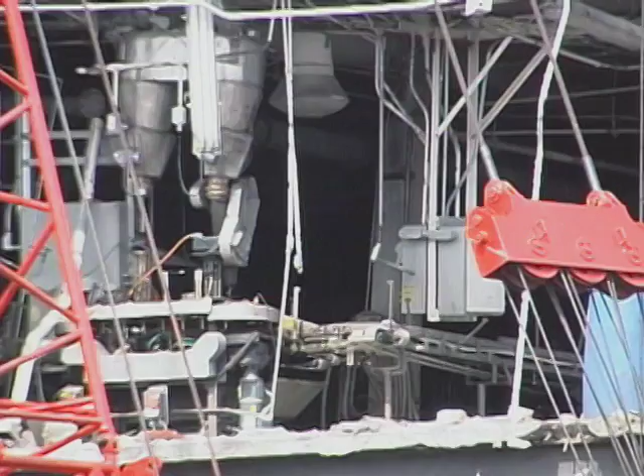Explosions raced through the buildings, fueled by accumulations of combustible sugar dust and sugar that had spilled from equipment. Thick concrete floors heaved up, and brick walls were blown into stairwells and work areas, blocking many exit routes. Fires spread rapidly.

8 workers died at the scene. 6 more died later at a regional burn center. Dozens of others were injured. The plant's massive sugar-packing buildings were a total loss.

The accident at Imperial Sugar was the deadliest industrial dust explosion in the United States in decades. It highlights the extremely serious nature of combustible dust hazards. There were significant accumulations of sugar dust and spilled granulated sugar on surfaces throughout this facility. Conditions were set for a catastrophic accident.

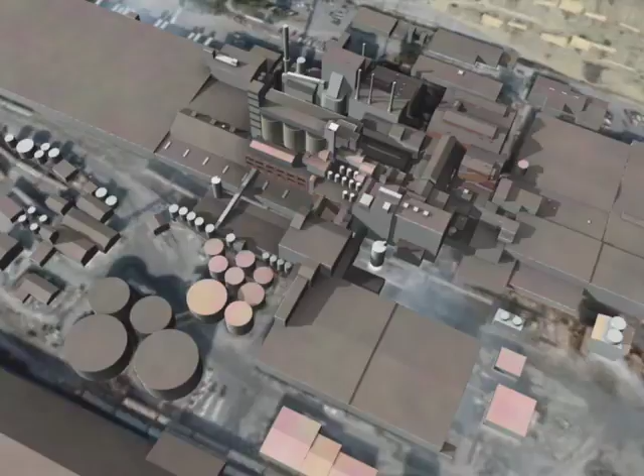Imperial Sugar's sprawling Port Wentworth complex began operations in 1917 and grew to become one of the largest sugar refining and packaging facilities in the U.S. Granulated sugar from the refinery was stored in three 100-foot-tall silos and then conveyed into packing buildings where it was packaged for distribution. Granulated sugar was also converted into specialty products, such as brown sugar and powdered sugar.

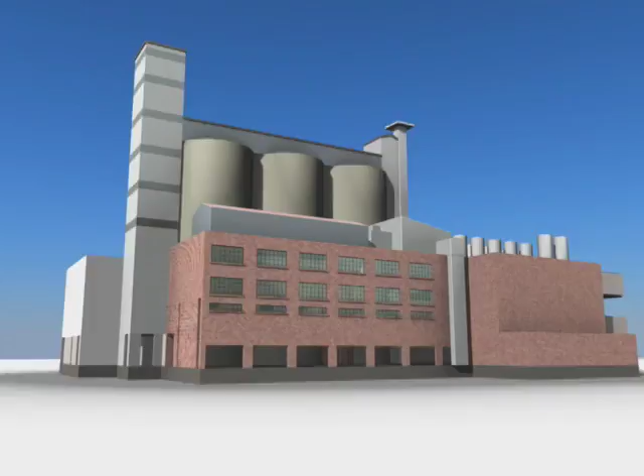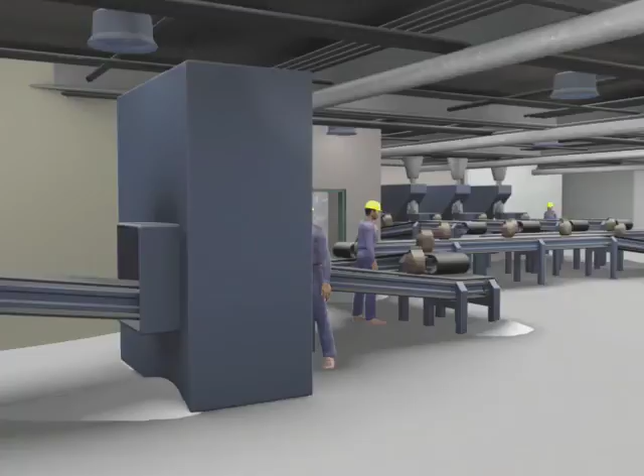Sugar was transported by a complex system of bucket elevators, screw conveyors, and conveyor belts. During this process, sugar spilled onto floors throughout the work area. In places, the spilled sugar was many inches deep.

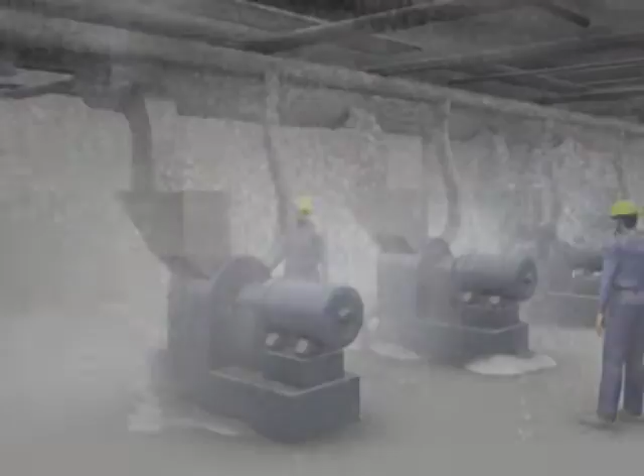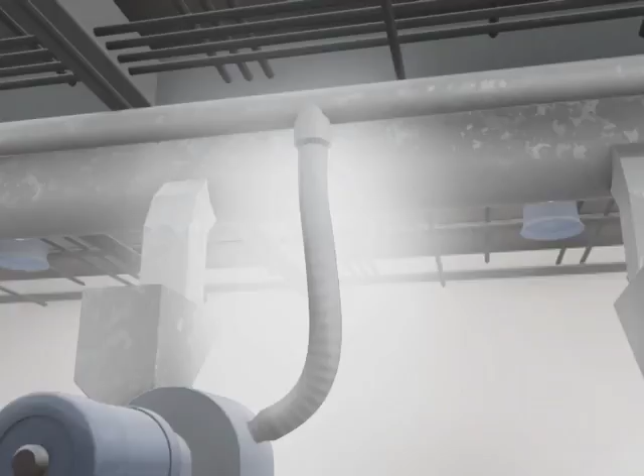This sugar also contained fine particles which became airborne. In addition, hammer mills were used to crush the granulated sugar into powdered sugar, creating even more dust. The machines were connected to a dust collection system, but it was undersized and in disrepair. And it was not connected to the bucket elevators and conveyors.

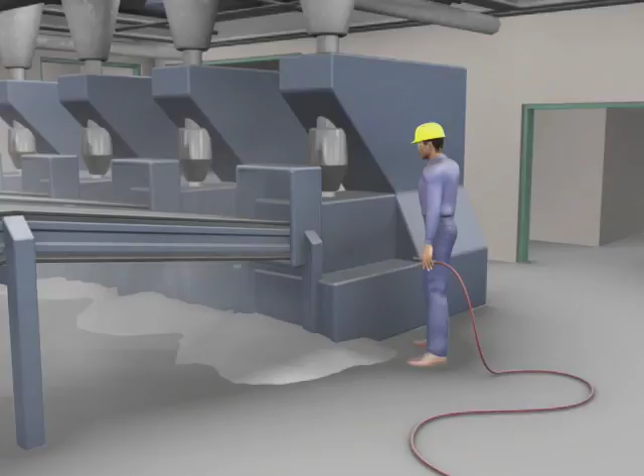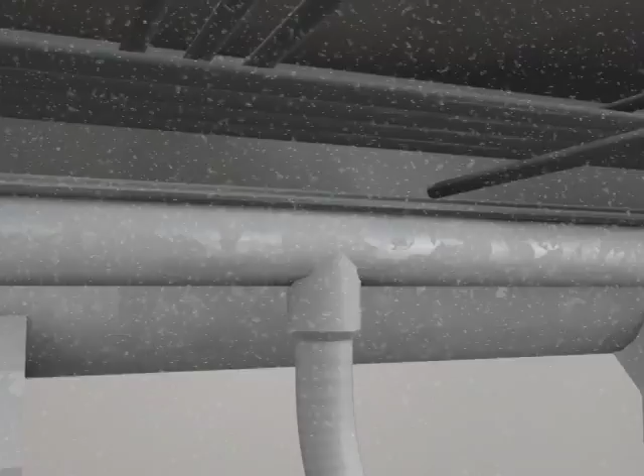Significant amounts of sugar dust escaped into the work areas. Workers routinely used compressed air to clean packaging machines, further dispersing sugar dust throughout the buildings. Over time, large amounts of dust accumulated on elevated, hard-to-clean surfaces, such as ducts, beams, and light fixtures. These surfaces were not cleaned often enough to always keep the dust below hazardous levels.

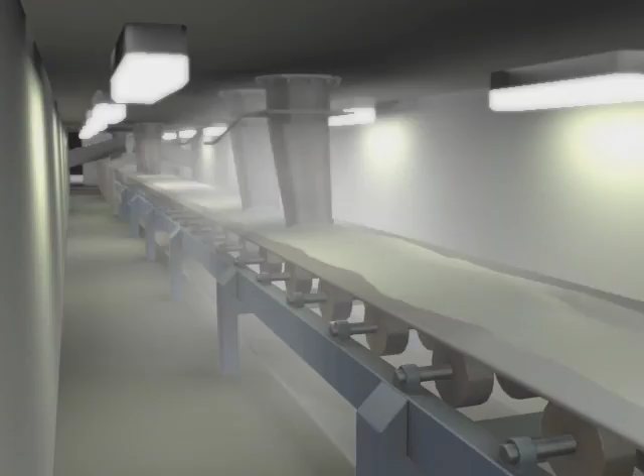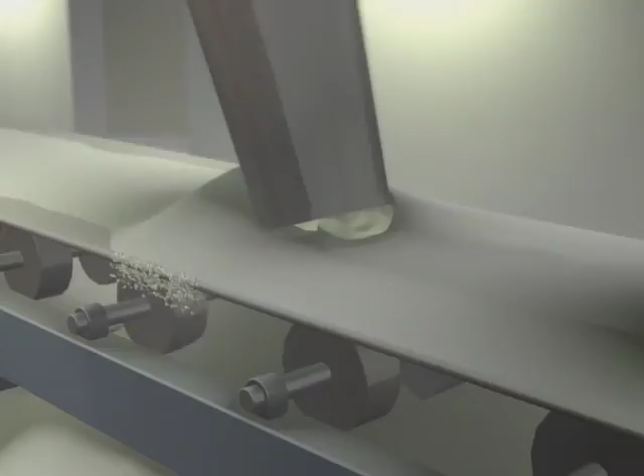In the tunnel beneath the sugar silos, granulated sugar flowed through chutes onto a long steel conveyor belt. From time to time, clumps of sugar would become stuck in one of the chutes, blocking the flow of sugar on the belt, spilling sugar onto the floor and releasing dust into the tunnel. But the tunnel was large and ventilated, so this airborne dust did not build up to explosive concentrations.

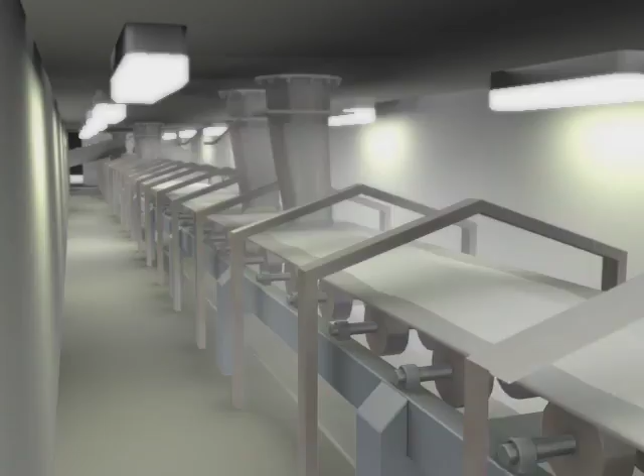However, in 2007, the company enclosed the conveyor belt with stainless steel panels to protect the sugar from possible contamination. The enclosure was not equipped with a dust collection system. As a consequence, sugar dust would now be trapped inside this enclosure.

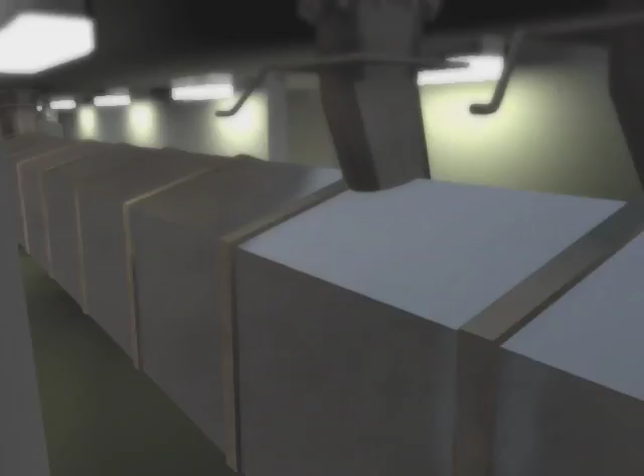On February 7, 2008, clumps of sugar were found blocking one of the discharge chutes. Sugar from the adjacent silo likely spilled off the moving belt. Dust likely accumulated to an explosive concentration inside the enclosure. At about 7:15 p.m., the sugar dust contacted a nearby ignition source, likely an overheated bearing, and exploded.

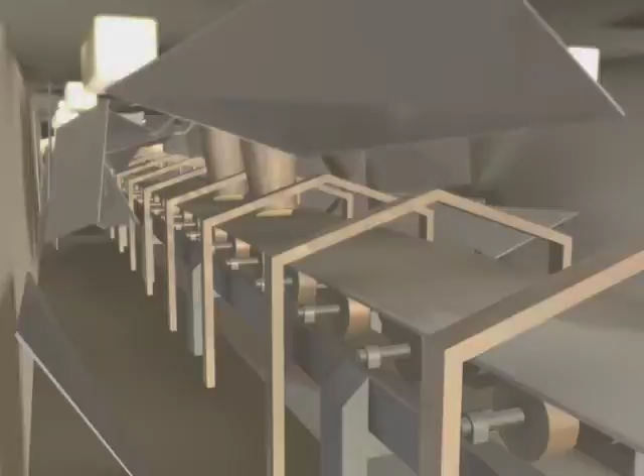This primary explosion blew apart the enclosure and vented into the packing building. Accumulated sugar was lofted and ignited by the advancing fireballs. The dust clouds fueled a chain reaction of secondary explosions, which swept through the buildings.

Concrete floors buckled, releasing tons of granulated and powdered sugar into the flames. Emergency evacuation drills had not been conducted, and the explosions had cut the power to much of the interior lighting. In the maze of darkened and damaged stairwells and passageways, workers desperately tried to flee the growing inferno.

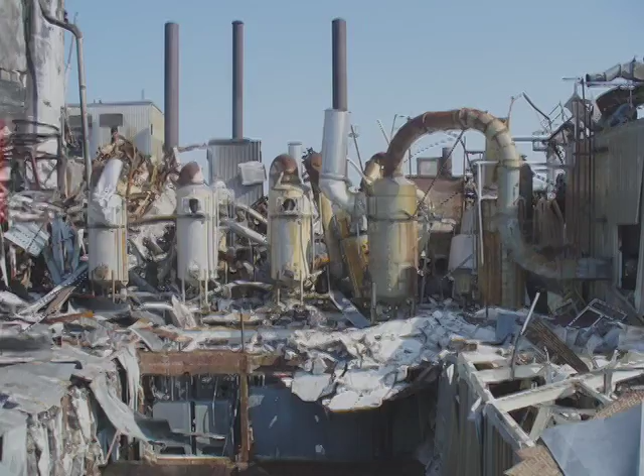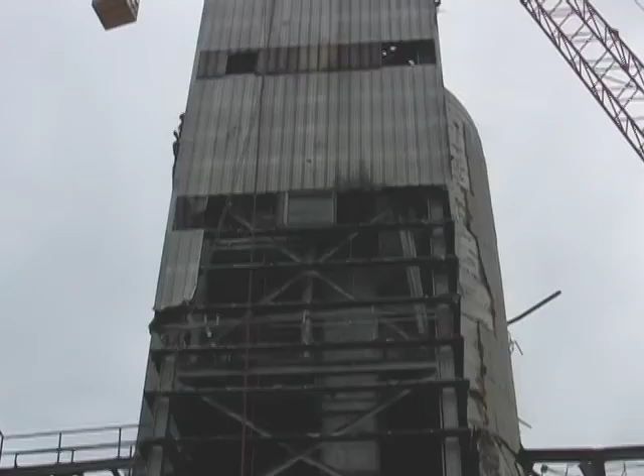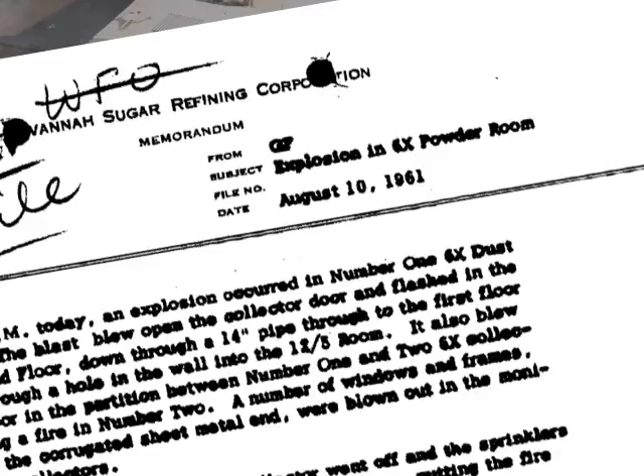The CSB found that correspondence dating back to the late 1950s showed that plant managers in Port Wentworth were aware of the explosive nature of sugar dust and the danger of dust accumulations. As far back as 1961, a memo described a sugar dust explosion that heavily damaged the powdered sugar mill room. Despite the long-standing awareness of the explosive nature of sugar dust, not enough was done to manage the hazard.

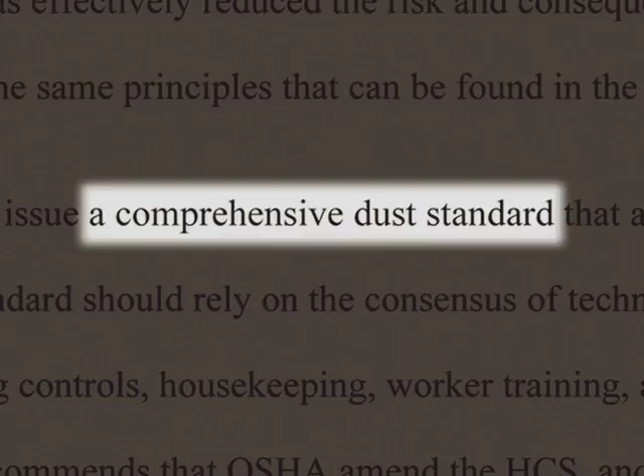In 2006, the CSB issued a study of combustible dust, which called on OSHA to establish a comprehensive combustible dust standard based on the current standards of the National Fire Protection Association, or NFPA.

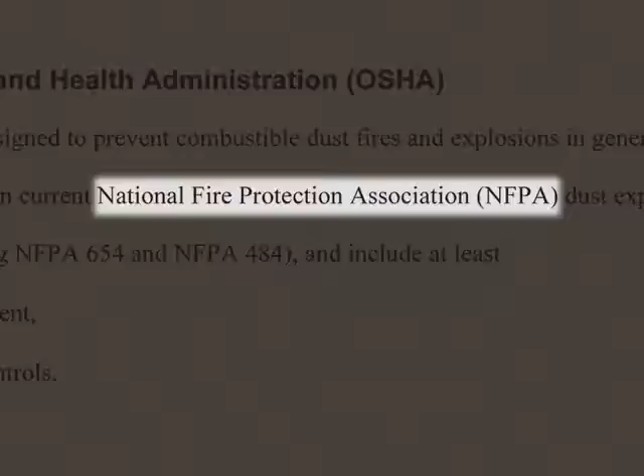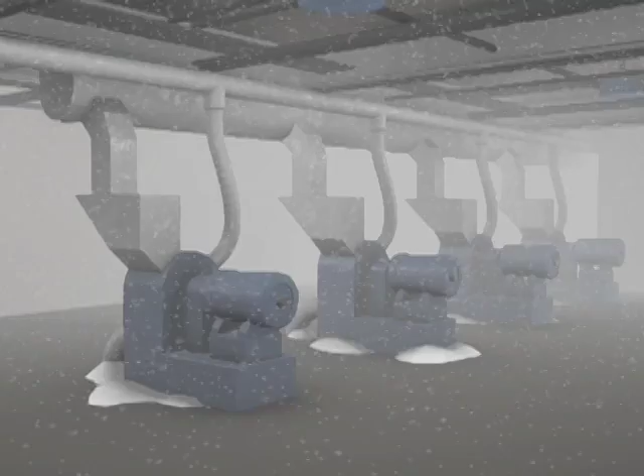In October 2007, OSHA began implementing a new national emphasis program to increase the enforcement of existing regulations related to combustible dust. Imperial Sugar learned of the OSHA Combustible Dust National Emphasis Program four months before the devastating explosion at Port Wentworth. But management did not act effectively to control the serious dust problem in the packing buildings.

Less than two months before the disaster, an internal inspection showed that many tons of sugar were still regularly spilling onto the floors. This provided much of the fuel for the massive secondary explosions and fires.

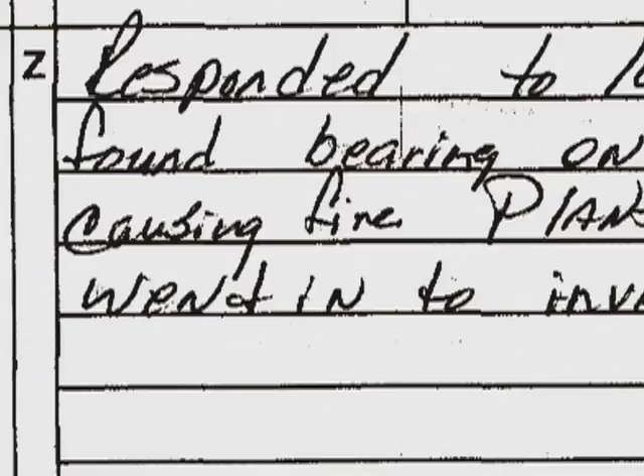The CSB found that over the years, the Port Wentworth facility periodically experienced small fires fueled by spilled sugar and accumulated dust on equipment. But none resulted in a sugar dust explosion that propagated through the plant. Investigators said that decades of operating without a catastrophic explosion may have lulled managers into complacency.

In its report, the CSB issued the following recommendations to the Imperial Sugar Company: apply NFPA standards to the design and operation of the rebuilt Port Wentworth facility; develop and implement comprehensive combustible dust control, housekeeping, and training programs; and improve emergency evacuation policies and procedures.

Companies can go a long way to control combustible dust within their own facilities by following the existing recommendations of the National Fire Protection Association. But it is also time for a comprehensive federal standard on combustible dust.

In April 2009, OSHA announced plans to begin rulemaking on a combustible dust standard for general industry. In its final report on the Imperial Sugar accident, the CSB recommended that OSHA move forward expeditiously with the new standard. Without regulation, enforcement, and education, workers will continue to be at risk from catastrophic dust explosions.